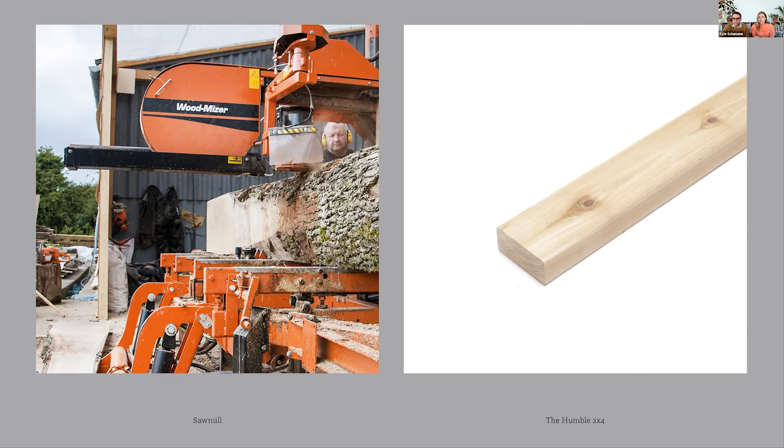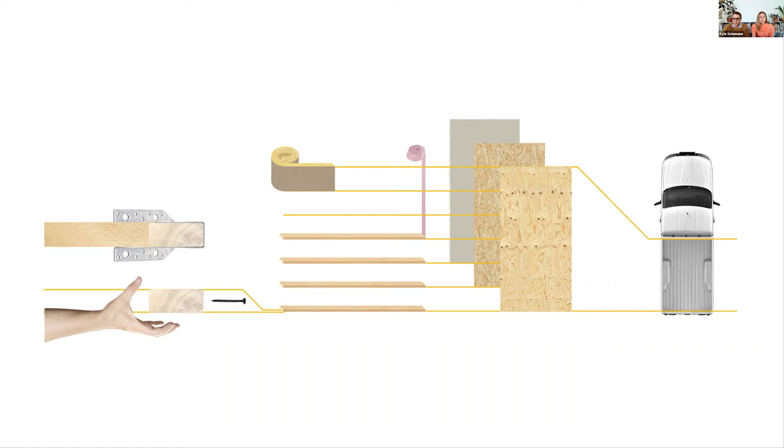In its earliest days, the Industrial Revolution birthed standards because mass production demanded uniform modes of manufacture regardless of geography. American construction embraced such modes for their ease, speed, and cheapness, and there is perhaps no building product quite so easy and cheap as the humble 2x4, which expanded to encompass an entire range of sequential construction practices and building products. This standard technology drove the housing boom in the early 20th century, championed by purveyors of prefab housing, who dressed this new technology in historic clothing in the form of previous architectural styles and floor plans, enabling widespread acceptance and adoption by the general public.

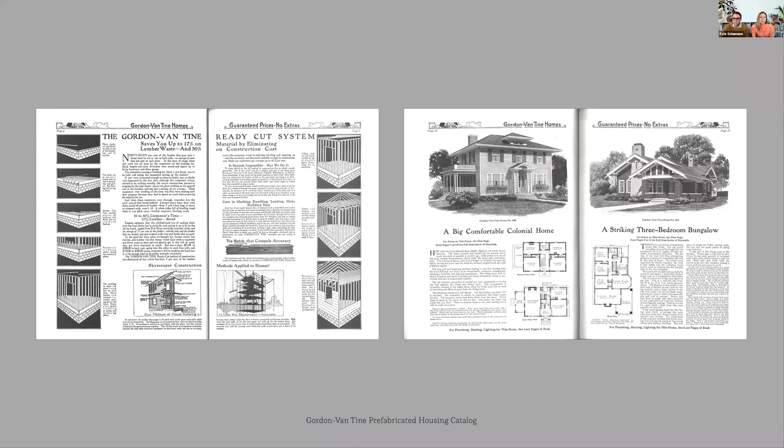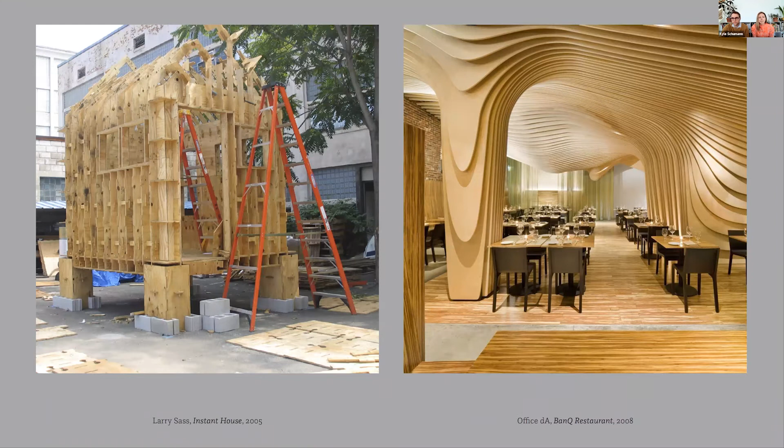Beyond industry, standardization practices were embraced by modern architects. In 1931, The Dwelling of Our Time, an exhibition by Lilly Reich and Mies van der Rohe, displayed full-scale prototype homes surrounded by the standard materials from which they were constructed, a blatant association between modern design and these materials. The tectonics of the more recent digital turn extend the tendency to subtract custom form from standardized materials. Laser cutting, CNC milling, and water jetting privilege the subtraction of parts from sheet materials.

More favorable, in our opinion, is the approach to straightening a log taken by Alan Wexler in his piece Reframing Nature, in which small incisions are made into the wandering trunk of a tree and wedges are slipped into the mass, redirecting the center line of the tree into a straight path. This additive operation maintains the trunk's taper, its protective skin, its efficient surface area. Wexler's log, leveraging the embodied intelligence of the tree, suggests another question entirely: why straighten, which is to say, standardize the log?

Our approach is situated between the totalizing digital world and the unfolding effects of climate change. If the gravity of the current climate crisis is indebted to mankind's historic tendency of superseding the needs of other organisms, conceptions of design authorship in architecture and beyond likewise center on the primacy of humanity, or have historically. We propose a conceptual shift from the authority of the human designer to a discursive and systemic relationship between design intent and ecology that can be enabled or mediated by technology.

The recent maturing and increasing economy of technological advances, such as 3D scanning and imaging, tomography, thermography, evolutionary solvers, and parametric modeling, make data and feedback accessible tools in this collaboration far beyond what we would call now maybe traditional digital fabrication techniques. And this enables a kind of kit bashing of technology in which processes are co-opted and aggregated. This field of inquiry is not without precedent.

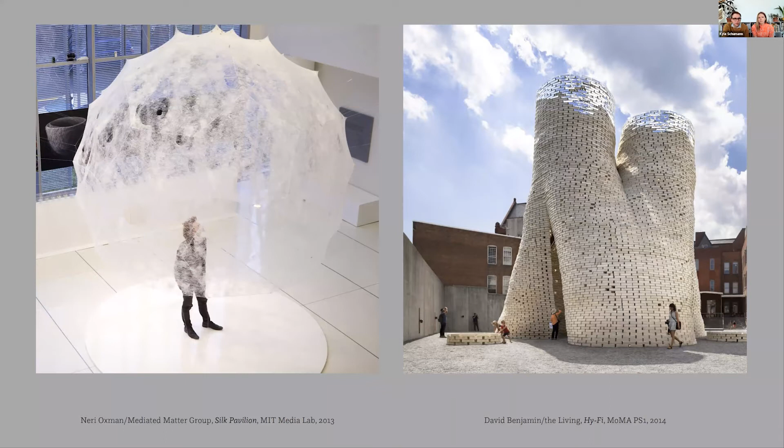More recently, Neri Oxman's Mediated Matter group has gone as far as using silkworms as construction workers in the creation of the Silk Pavilion seen on the left, and David Benjamin's MoMA PS1 pavilion Hy-Fi put the potential of mycelium as an architectural component on an international stage through its display at MoMA PS1 in Queens. The acquisition of this practice called The Living by Autodesk a couple years back demonstrates industry interest in such developments and new ways of looking at and utilizing biological materials.

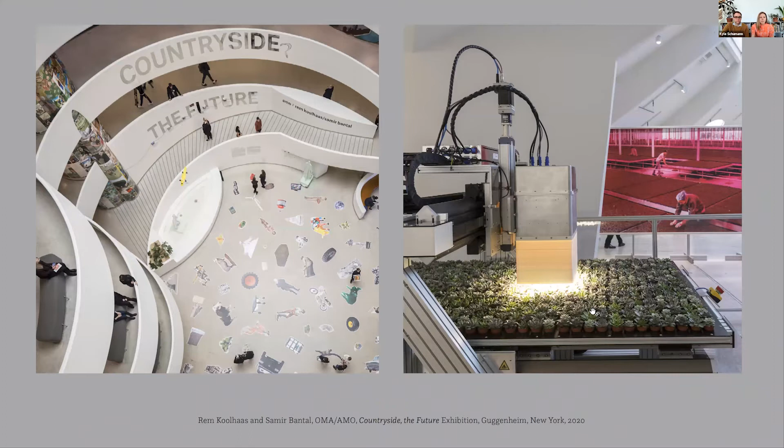Finally, we see even Rem Koolhaas, the famed urbanist, has turned towards the technologies and species of the countryside as a new architectural frontier. Our work moves beyond biomimicry and introduces bioagency as a design strategy, leveraging digital feedback to transform traditional design authorship into a mediation between biology, technology, and human intention.

Bioagency liberates designers from an anthropocentric paradigm, subverting the primacy of humans over nature, proposes a new system for assigning value, and promises potentials for symbiosis with nature. It willingly synthesizes the intentions of the designer with natural processes. And so here we start to put this new approach or term or value set in dialogue with some existing and strong approaches that have dealt heavily with the intelligence of biological material and suggest new ways of advancing the biological paradigm in architecture.

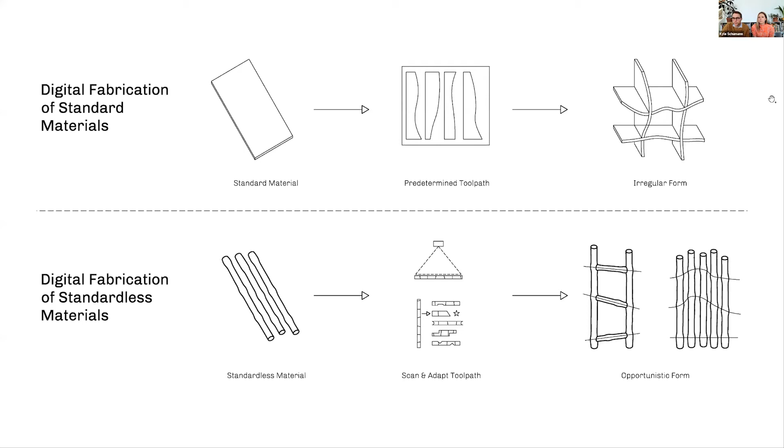And so in this case, that involves scanning and understanding that material, and then allowing those qualities that are understood computationally through understanding the form and structural properties of these different materials to influence the formal qualities or other performative or aesthetic characteristics in the built construction, and allowing that process to shape the end product along the way through the design process.

And so we're going to start shifting into some teaching and research work by us now. In talking about some examples of biological agency, the first category here we're calling digital doppelgangers, which relies on this visioning and the creation of a digital twin to inform the process and help us to understand the material through various means. This first project, called Retooling Bamboo, is part of a longer research initiative in collaboration with a couple of faculty at Virginia Tech, including Jonas Hauptmann and Daniel Heinemann.

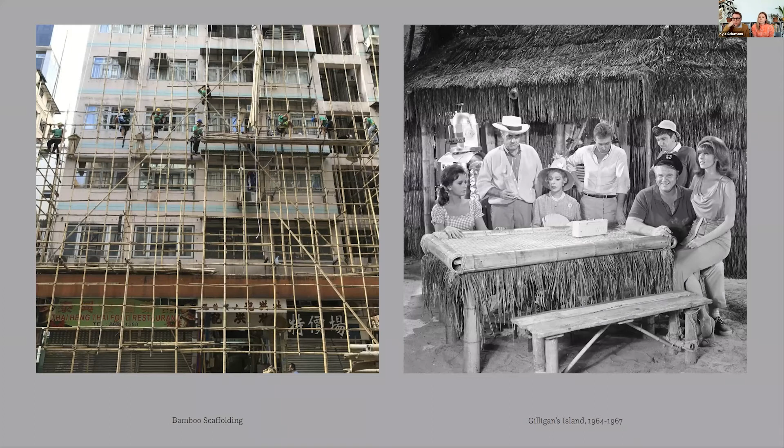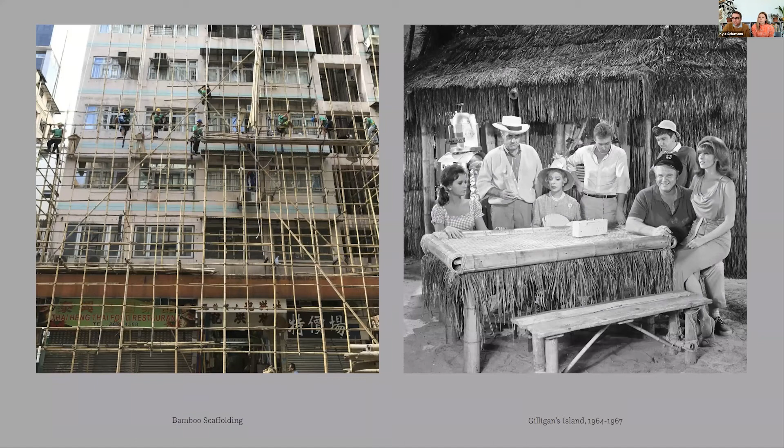So the interest in this project in using bamboo started out thinking about this cultural aesthetic stigma that exists around bamboo and some other natural materials. If you think of anything aside from lumber, then there's various associations of this material with informal or temporary structures, such as bamboo scaffolding, which has incredible utility and structural capabilities, as is well known in Asia and other parts of the world.

And we're also contending with the cultural imagination in terms of Gilligan's Island and the sequestering of bamboo as a construction material to this kind of tiki hut kitsch. And those are barriers that need to be overcome if the material is to be implemented on a wider scale or within other cultural contexts globally.

And so this work started by looking at an analog process of analyzing the material by systematically cutting sections, scanning that material in a 2D scanner, drawing profiles from those cut sections to analyze what the general parameters were for how this bamboo grows from top to bottom, and how the wall thickness decreases as the overall diameter decreases, going from right to left here up this bamboo pole.

And we're working with a particular species of bamboo here native to Vietnam. It's a tropical species, so it's very solid compared to a lot of other types of bamboo. And so that wall thickness allows us to do some things later on in the project that are maybe more specific to this category of bamboos, as opposed to some of the more commonly seen thin wall varieties.

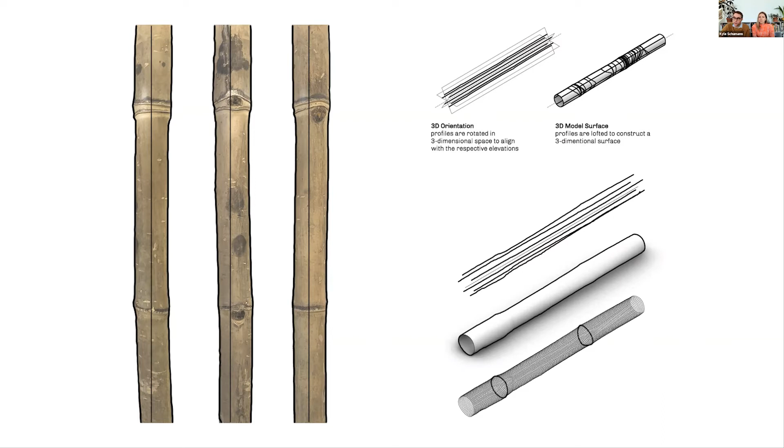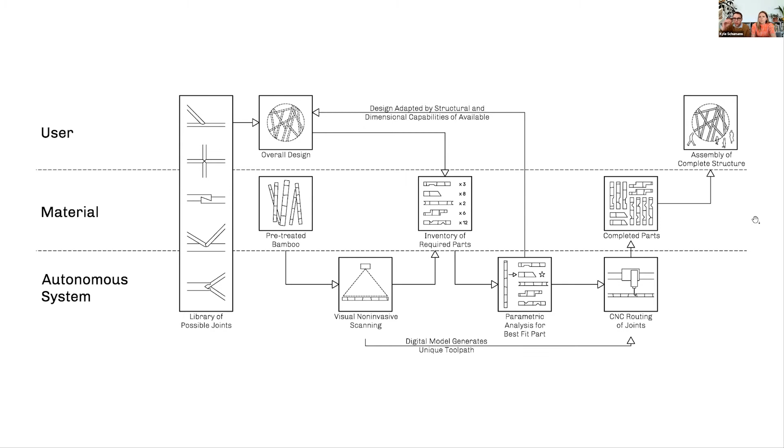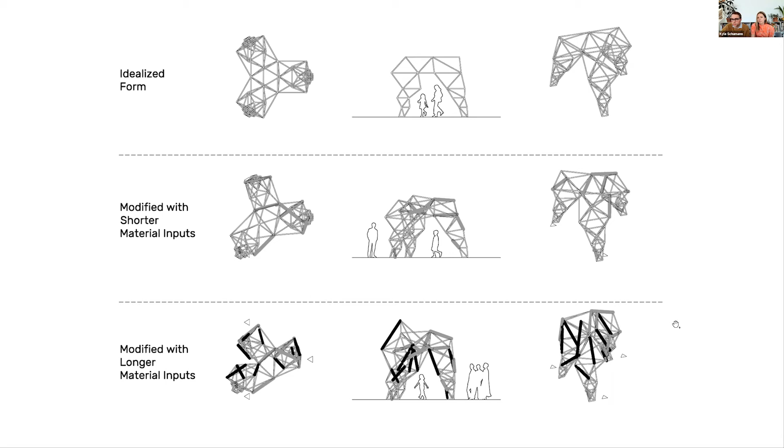And so that might be a little bit abstract here, but in another drawing, we can see there's an idea about having some idealized form developed by the designer on the top. And if you start allowing that structure or that assembly to adapt with, in this case, longer or shorter material inputs that are based on the node spacing of that material, given that it's solid at each of those nodes as the bamboo is growing, the structure is allowed to adapt itself based on those material inputs. And so these are the kind of ideas behind the project.

Another project dealing with this idea of digital doppelgangers we call Twinned Assemblage. And the results of this work shown in this section of the talk are from a course that we taught together last year at the University of Tennessee, Knoxville. And so the process is a little bit similar in that we're using relatively low technology, accessible, democratized 3D scanning solutions. But in this case, instead of building that from scratch, we're using a 3D scanning smartphone app that runs on anyone's smartphone today.

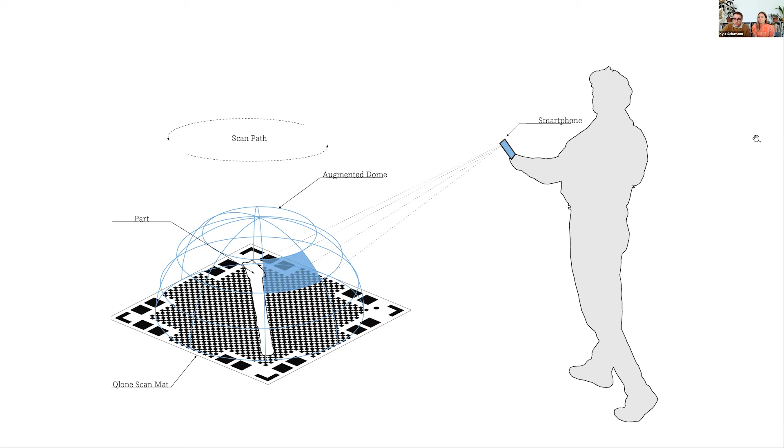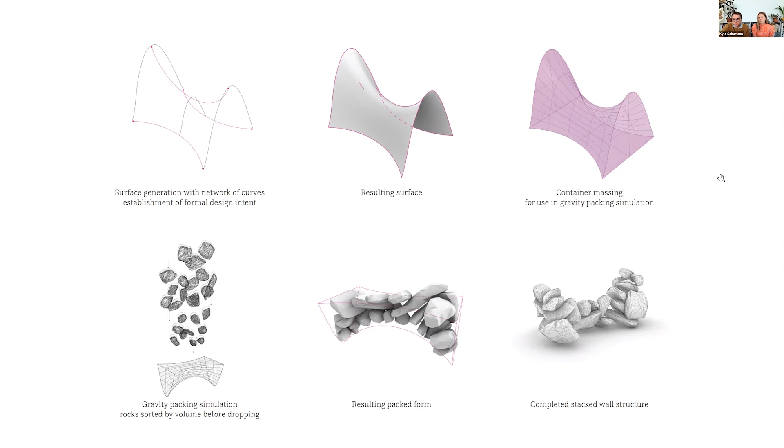This one was using a kind of gravity simulation to pack these objects into a sort of predetermined form. And there's a variety of different methods here. Again, thinking about that distillation method, there's a bunch of different ways that we can think about this material, taking on different qualities, or distilling or extracting different elements that can be used strategically by the designer in order to determine what qualities of the material are most important to inform a particular aggregation.

So these scrappy studies on how we create digital twins, or what we've been calling in these three examples digital doppelgangers, are really aimed at how our digital understanding of material can not only duplicate reality, but distill it and leverage its qualities.

And so this project that we'll show now is a design build project that came out of a studio that we taught together at the University of Tennessee, where the students attempted to reconcile these branches with a design form, here represented as the curve. So how could the peculiarities of the branches achieve what the curve set out to do?

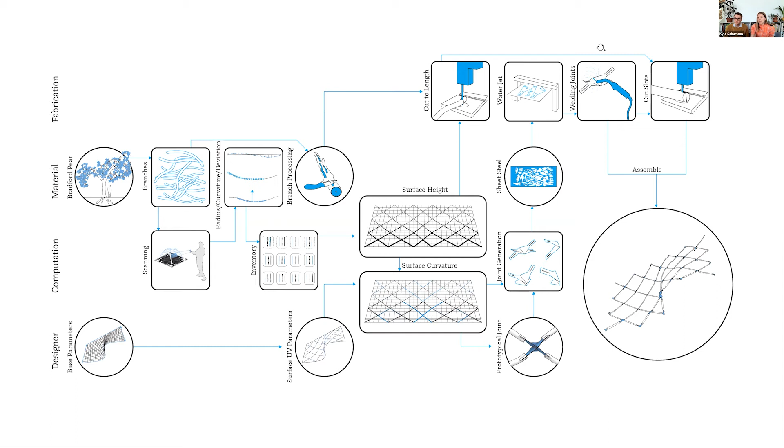And so again, the system diagram becomes an important actor for us between the biological and the designer, a relationship in which there's feedback and conversation before a final output. The process is not always linear.

And so in this case, the students were looking at how branch curvature could be documented and analyzed through computational means. So first starting with 3D scanning on the smartphone, a really simple, cheap way to do it that didn't require high-tech equipment, and then starting to pull out different pieces of information that could then be put into the recipe for the design.

There's also an idea about, again, having some predetermined idea about the assembly. And so in this case, it was a simple wall structure with a curving base and a straight top. And so the complex geometry of that surface was broken down into a series of legs or elements through manipulating that mesh.

And then there was an idea about mapping these materials that were 3D scanned to that surface. And so on the bottom middle, you can see they're sorted from larger diameter pieces arranged along the bottom to smaller diameter pieces along the top. But there's also a mapping of the overall curvature of each branch to a particular part of that surface, matching the curvature of the idealized surface.

And there's a bit of feedback where the curvature of those branches, if it was very different from any possible location on the mesh, can actually inform and distort the overall geometry of the project, allowing the material to feed back and influence the final form.

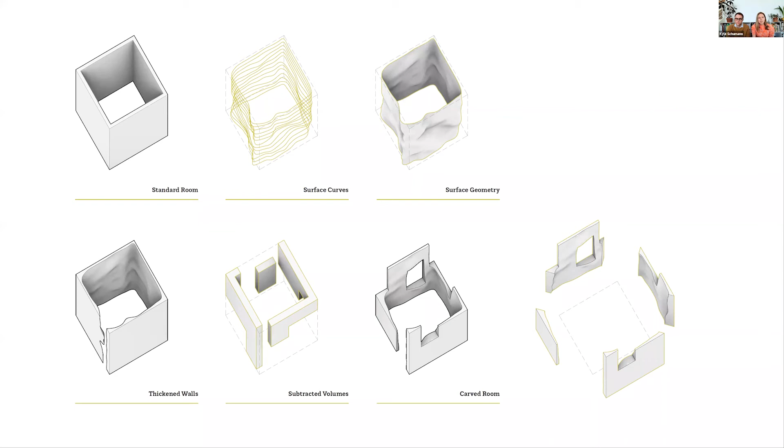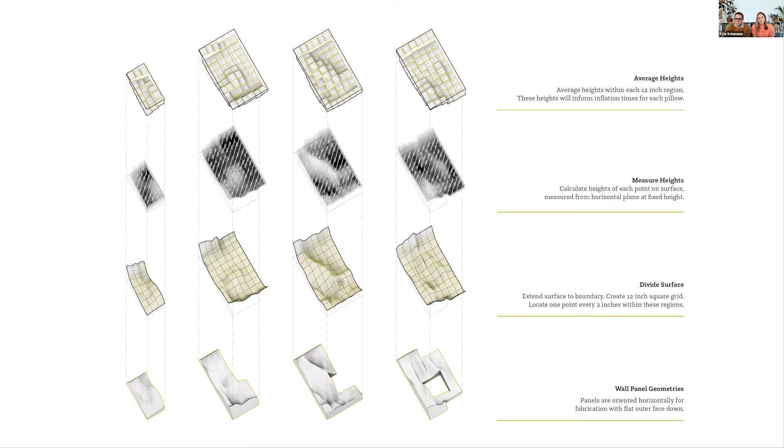And in this case, there's a series of 4 walls, some of which are taller than 3 feet, and so it involved a 2-step forming process for the top and bottom of each of those surfaces. The resulting installation proposes an alternative material ethic by making use of small-scale landscaping waste, including invasive plant species such as kudzu, bamboo, and various tree species, as well as forestry waste. The plant fibers are formed into lightweight wall-scale panels using a liquid bio-based binder.

In a nod to the materials of traditional American framing, the panels are faced in pine needles and rest on a base of dimensional lumber. The top edge steps up and down, suggesting doorways, windows, ledges, seats, a rewilding of the domestic. The resulting architecture is not flat and hard, but fuzzy, fluffy, furry, shaggy. It is simultaneously primitive and high tech, and it is not permanent, but temporal. So this kind of architecture may require caretaking and maintenance, not unlike a landscape or an occupant.